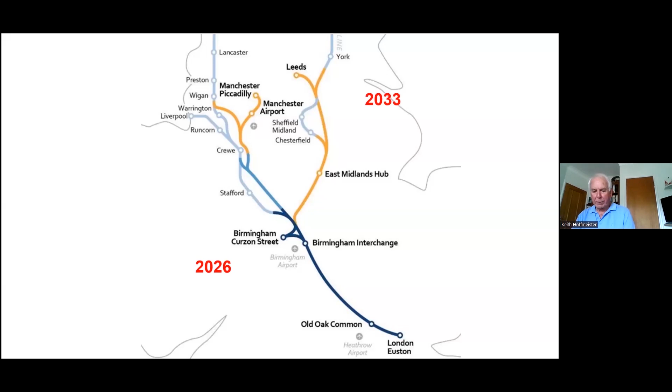I'd like to start with a much revised construction timetable. Phase 1 will run from London to Birmingham and was originally due to be completed in 2026. Phase 2A will run from West Midlands and then on to Crewe, and Phase 2B extends the route to Manchester and Leeds, and these were originally due to be completed in 2033.

In 2019, HS2 confirmed that the project would be delayed by up to 7 years. Phase 1 would now be completed sometime between 2028 and 2031. Phase 2A sometime between 2030 and 2034. And Phase 2B, the western leg from Crewe to Manchester, 2035 to 2041. The eastern leg to Leeds was cancelled in 2021.

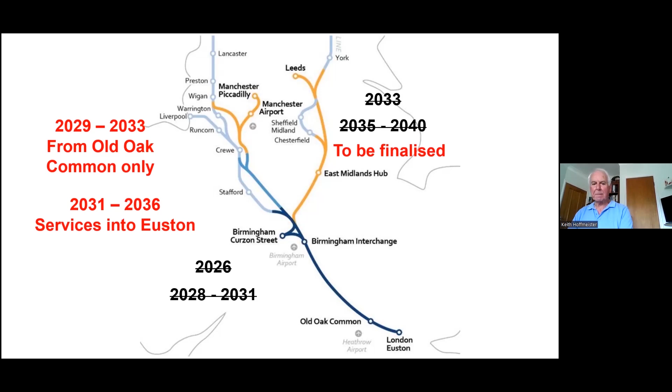In 2020, it was announced that initial services would start in 2029 at the earliest, and that they would start from Old Oak Common in West London, not Euston. Services wouldn't start from Euston until at least 2031 and possibly 10 years later than first stated. The planned initial 14 trains an hour in peak times would not be possible until services start and finish at Euston. Old Oak Common can only handle 6 trains an hour.

In March this year, in an attempt to cut the spiralling costs, it was announced that Phase 2A, the Birmingham to Crewe leg, and Phase 2B on to Manchester would be delayed by up to 2 years, as would Euston Station.

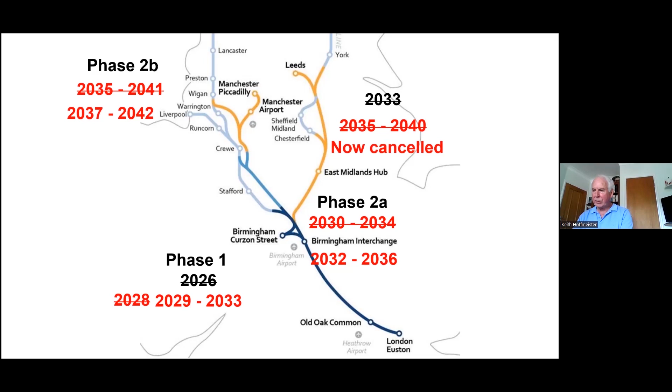Transport Minister Huw Merriman stated that the government remain committed to delivering HS2 services to Euston, but that it will take time to ensure an affordable and deliverable station design. They've already had 8 years, which means delivering Euston alongside Phase 2B to Manchester is now at least 15 years late.

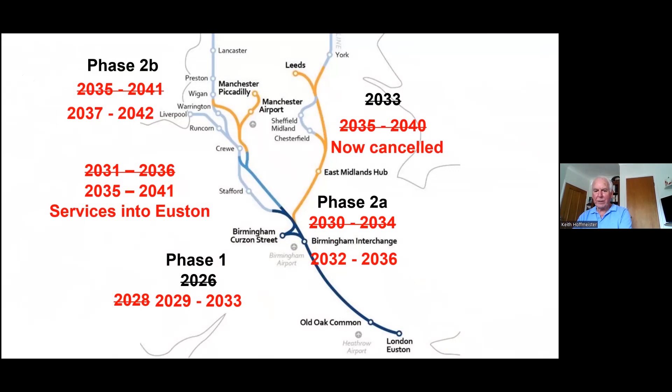The cost of the new station has now risen to an estimated £4.8 billion, almost double its estimate just 3 years ago. And this was for the cut price rethink devised when the first design was deemed too elaborate and expensive.

The Department for Transport revealed that significant elements of the original design work on Euston Station could no longer be used. As a result, HS2 Limited had to discard large parts of the original design on which it had already spent some £105 million.

Just yesterday, the Public Accounts Committee accused the government of setting unrealistic budgets and failing to learn from other troubled rail schemes. The report said that despite the Department for Transport planning the station for 8 years, it still did not know what it was trying to achieve.

It also criticised pausing construction without knowing how much this would cost or assessing the impacts on the supply chain. Dame Meg Hillier, chairman of the committee, described the project as floundering and accused the government of forging ahead over-optimistically and in an unclear direction.

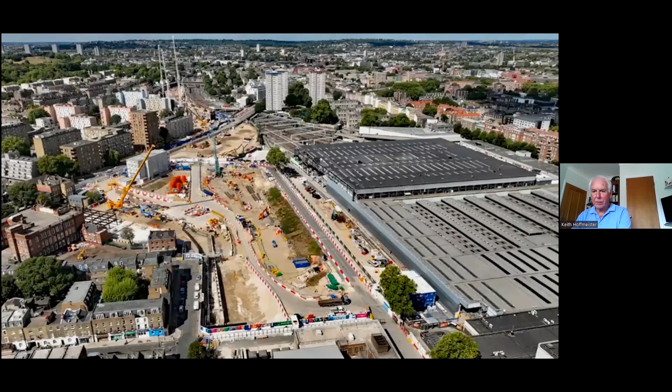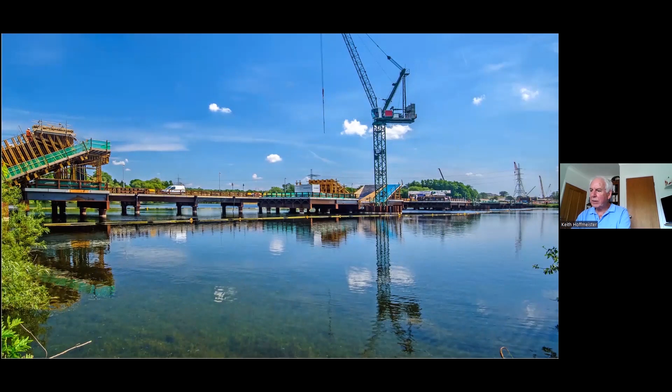A haul road has been constructed along the length of the viaduct on a series of jetties across 4 lakes. This is looking back across the first lake towards the south end of the viaduct, showing the construction of the giant viaduct piers.

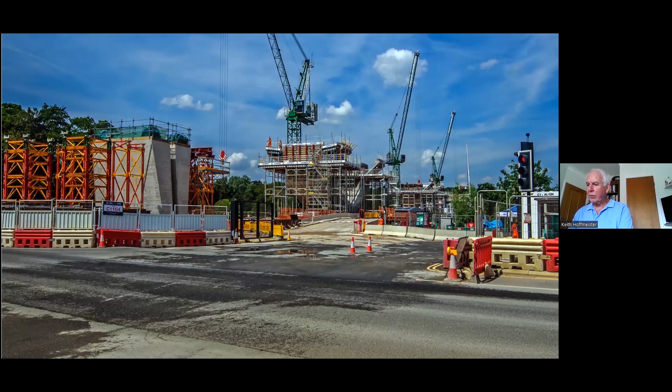Now, looking north across the Grand Union Canal, showing the piers being constructed across Savay Lake. Now, this is the first road it will cross, looking north from Moor Hall Road, where it's actually crossing Korda Lake. And the road here will soon be closed for a month to allow construction of the viaduct across the road.

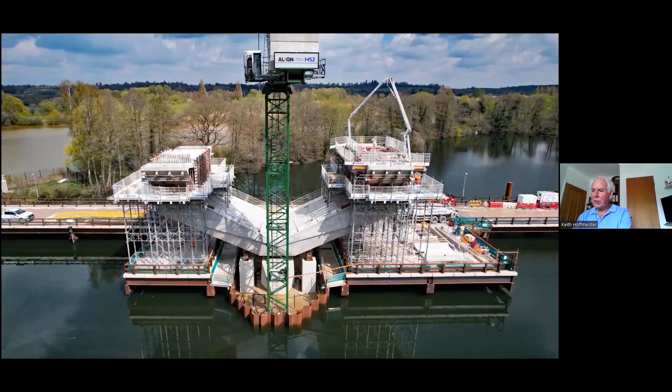The first of 11 enormous V-shaped piers have been completed across the lake. The piers, each weighing 1,800 tons, will support a row of elegant arches inspired by the flight of a stone skimming over the surface of the water.

Cofferdams were used to hold back the water while the 60-metre deep foundations were built into the bed of the lake. This is the launching girder, and it's currently working its way across the River Colne.

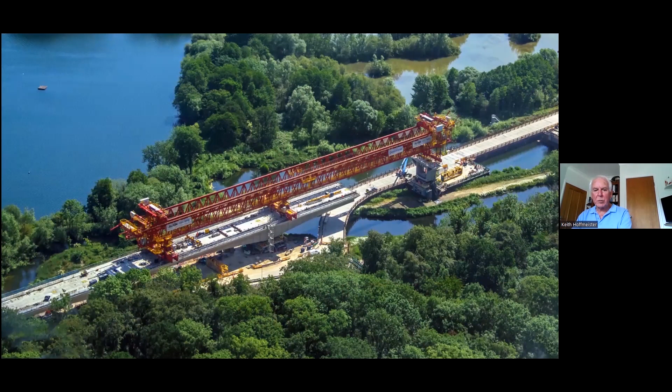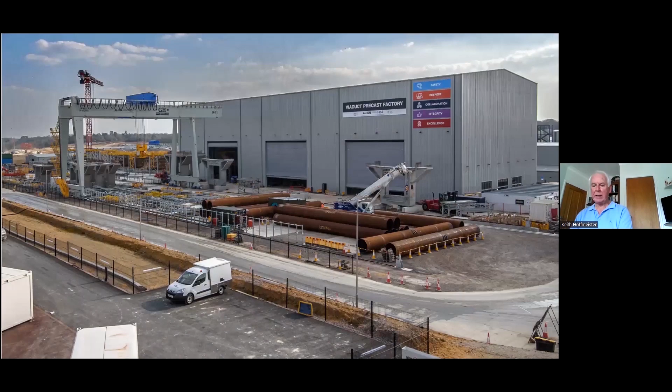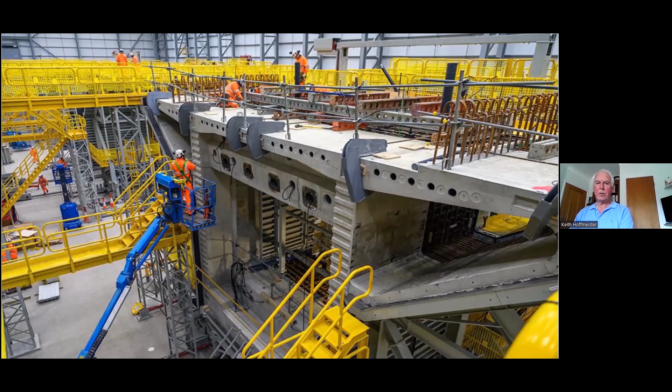Just a reminder that all the viaduct sections are made on site. The factory used to make them is actually bigger than the Albert Hall. They are currently making 12 a week, and 1,000 will be needed altogether. As the viaduct is on an elongated curve, every segment will be slightly different shape, depending on where it fits into the viaduct.

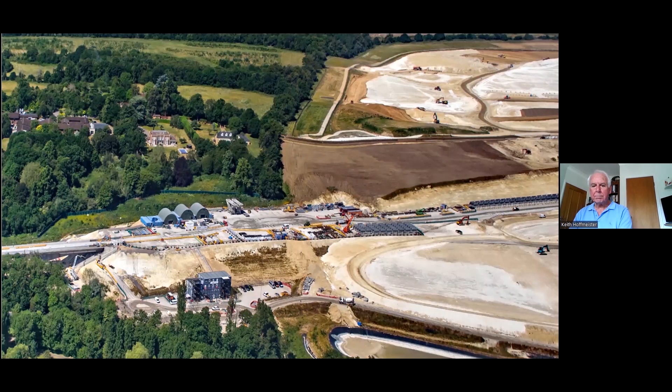The route leaves the viaduct on the West Hyde embankment at the northern end. It then enters the Tilehouse Lane cutting. The spoil removed from the Chiltern Tunnel and all of the tunnel ventilation shafts is being used for local landscaping here.

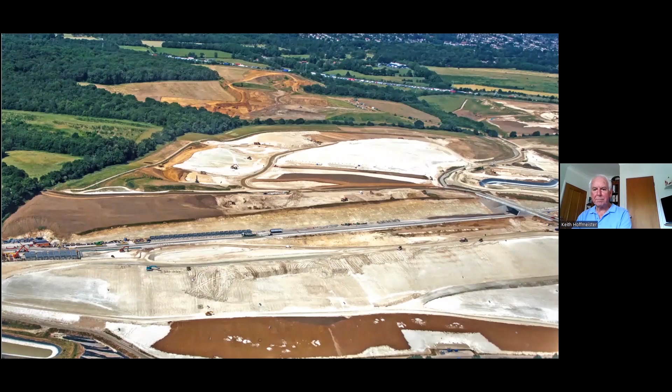This is the actual tunnel portal, the entrance to the tunnels. It shows the close proximity of the M25, which you can see running across the top of the picture. This is west of junction 17. The tunnel boring machines, the TBMs, started work here in May 2021.

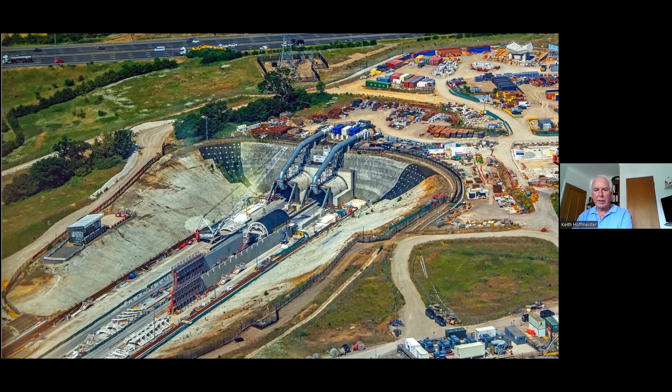Crosses show the area we'll be looking at now, from the M25 across the central Chilterns all the way to Wendover. This shows the 4 tunnel ventilation shafts across the Chilterns. There will also be an intervention shaft near the North Tunnel portal at South Heath. The A413 is the road that runs past the Chalfonts and Amersham and then on to Great Missenden and Wendover.

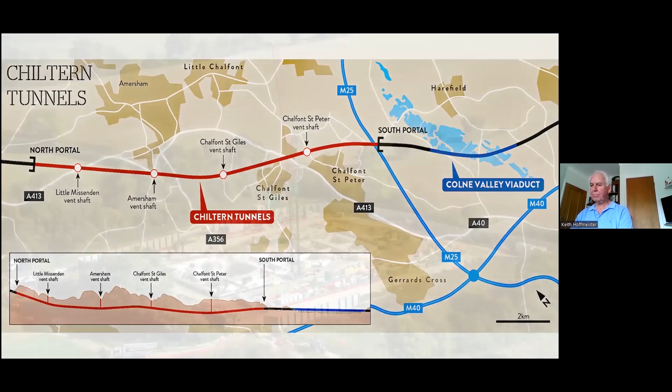This is the first of the shafts, the Chalfont St Peter vent shaft. You can see alongside the shaft itself the basement that will house the ventilation fans, which has been constructed. The fans are now underground, so that's what the basement is for.

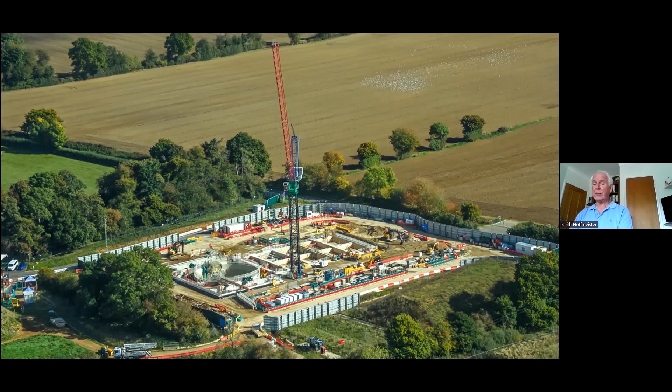Construction of all of the shafts themselves is now complete, and this is a compilation of the ongoing work at all of the vent shafts.

So this is a basement which will house the fans, which I just mentioned. They were all made using what they call secant piling, where the walls are constructed using interlocking piles, and the material is then removed, creating the basement.

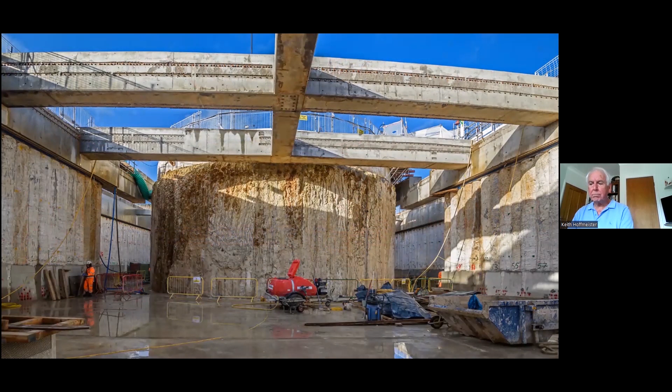The top of the shaft is then revealed. And then this is removed down to the basement level.

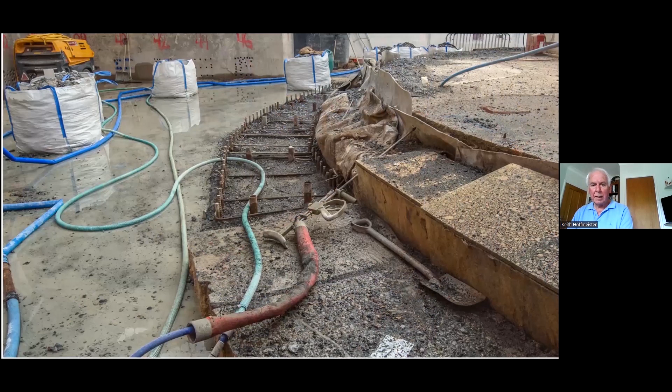The final sections are actually removed using a method known as hydrodemolition. This uses what is in effect a very large jet washer, which has a pressure of 3,000 bars. It can actually cut through concrete and even the steel reinforcement. And just to give you an idea, the water leaves the end of it at 1,500 miles an hour.

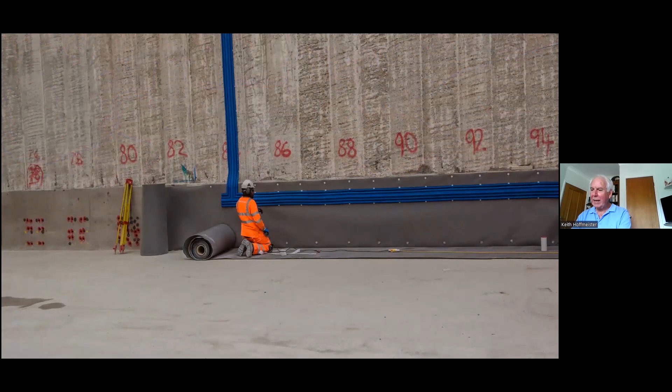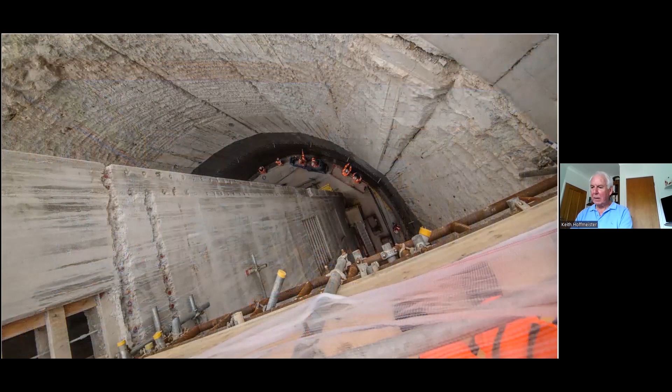Great care is taken installing a waterproof membrane over the whole area. A base slab is then laid and the walls lined. Internal work structures within the shafts are then added and tunnel connections installed at the base.

Here, reinforcement is being put in place, ready for the shaft lining. And this is the basement level of the shaft.

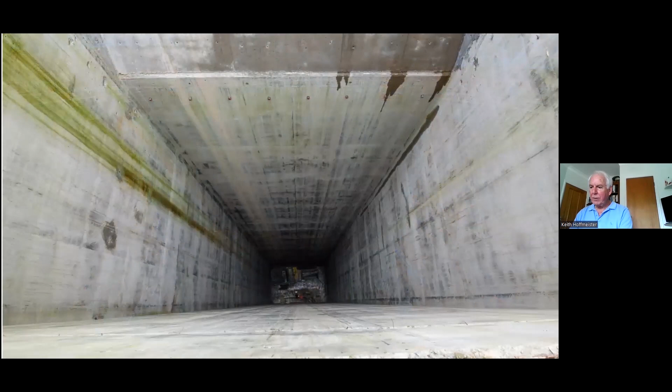Chalfont St Peter is the deepest of the shafts, at over 66 meters. Internal work structures within the shaft and the tunnel connections are now being installed, and the tunnels themselves are 55 meters below ground level. To put this into perspective, Nelson's Column would fit in the shaft above the tunnels.

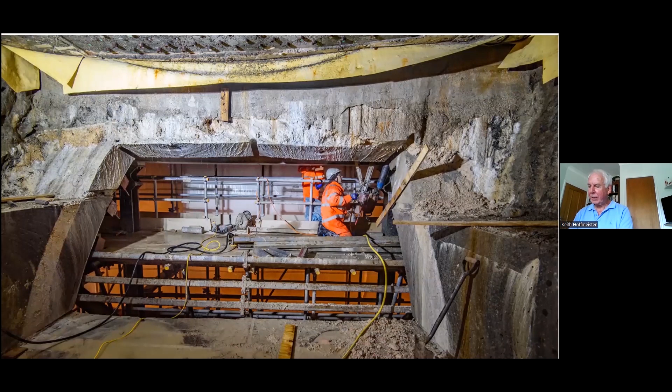The lift descends 12 levels before reaching the tunnels. And here they are cutting through from the vent shaft into the upline tunnel. The TBMs arrived here in March last year. And you can just see beyond the chap himself, that is actually into the tunnel.

A 400-metre long temporary haul road links the site directly to the A413. All the construction sites have approved access routes which HGVs must use. The one for this site is via the A413 to the A40 at Gerrards Cross and then to the M40. Temporary traffic lights control traffic on the A413.

The haul road will be in operation until the shaft is completed early in 2025. It will then be removed and the land restored to its former use.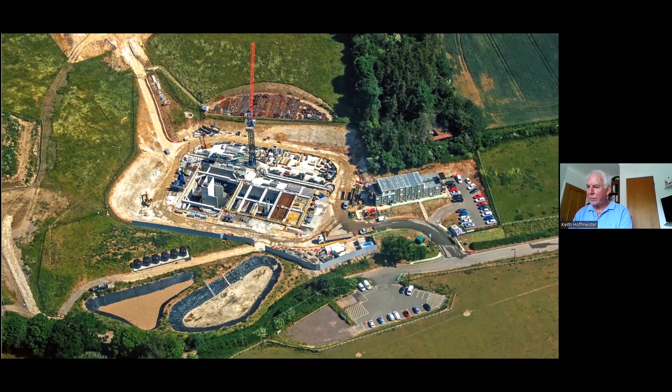The TBMs reached here last September.

And the shaft depth here is 34 meters, so quite a lot shallower than Chalfont St Peter's. The tunnels are 26 meters below ground.

That's looking down to the bottom of the shaft. And the locals, as you can see here, have got used to the work going on.

You can see clearly the temporary haul road going back to the A413 at the top of the picture, and just beyond there is Harewood Downs Golf Club, so it gives you an idea of where it is. This will be removed once construction of the vent shaft is complete.

All the HGVs have to turn right when leaving the haul road and use the same access route as for the Chalfont St Peter shaft. Bottomhouse Farm Lane will be reinstated, but it has not been decided just how this will be done, as the original approach to the junction was too steep.

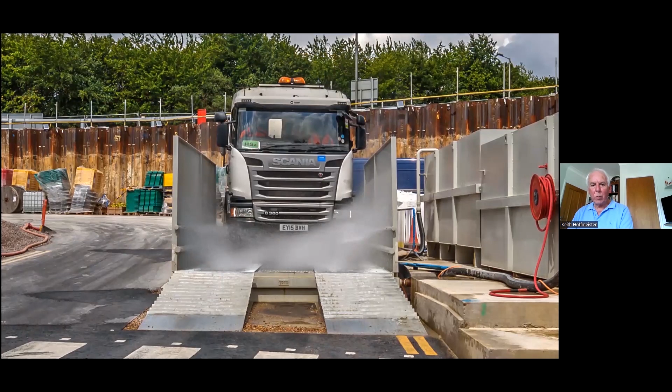All the vehicles have their wheels washed before leaving all of the sites, and there is continuous dust suppression in dry weather. As with most sites, air quality and noise levels are constantly monitored.

Beyond Amersham, the tunnel passes between the 18th century Shardeloes House and Shardeloes Lake. During the early hours of Saturday, the 13th of May, a sinkhole opened up about 100 metres south of the lake.

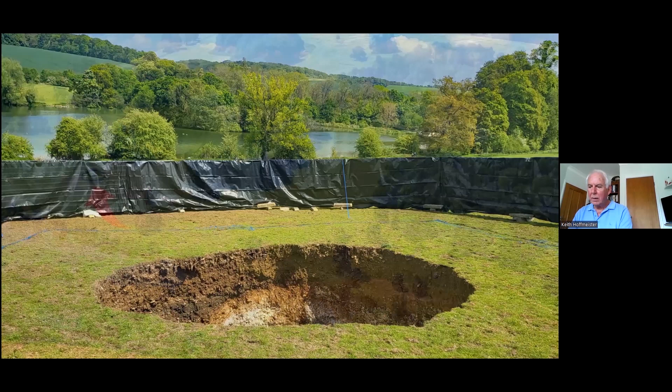The hole was approximately 6 metres in diameter, 5 metres deep, and 32 metres above the HS2 tunnel being drilled by one of the TBMs. And this is an explanation of exactly what happened.

Earlier in the week, the TBM, named Cecilia, digging the down tunnel, had been stopped for routine maintenance. On restarting, it ran through a dissolution feature, a void in the chalk, which contained large loose lumps of flint. These damaged the flexible pipework between the cutter head and the spoil pipeline, which required another stop for repairs.

The disturbance caused the unstable ground above the tunnel to fail and collapse, and this was propagated back to the surface, creating the sinkhole.

Backfilling works have not yet begun, nor has a thorough plan been agreed. This is actually on private Grade 2 listed land, and discussions with the landowner continue. The contractors intend to excavate below the bottom of the hole until competent ground is reached before backfilling begins.

The TBMs then passed under the Misbourne for the second time. There were no problems with the first crossing at Chalfont St Giles, and I'm very relieved to say there were no problems with the second crossing either, much to the relief of many people, not least, I'm sure, the tunnelling engineers.

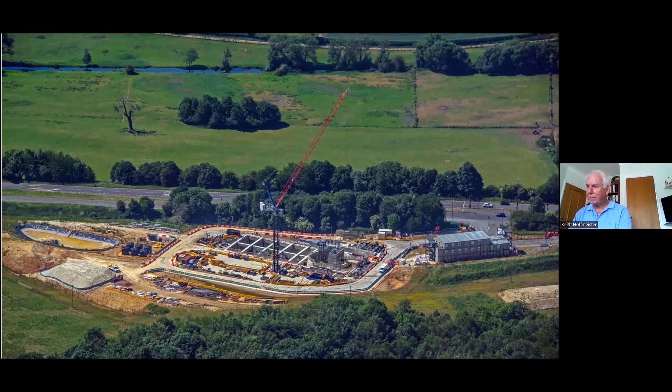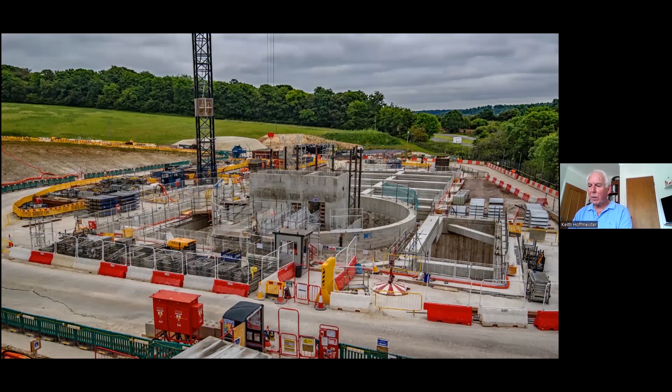The shaft depth here is 31 metres, and the tunnels will be 24 metres below the ground. The TBMs reached here last month and are now on their way up the hill towards South Heath.

Access to the site here is via a temporary right-hand turn across the dual carriageway. This saves a five-mile round trip to the Frith Hill roundabout at Great Missenden. This will be removed once construction is complete.

And this is another picture taken yesterday. At the moment, there are daily lane closures to allow careful monitoring checks for possible subsidence.

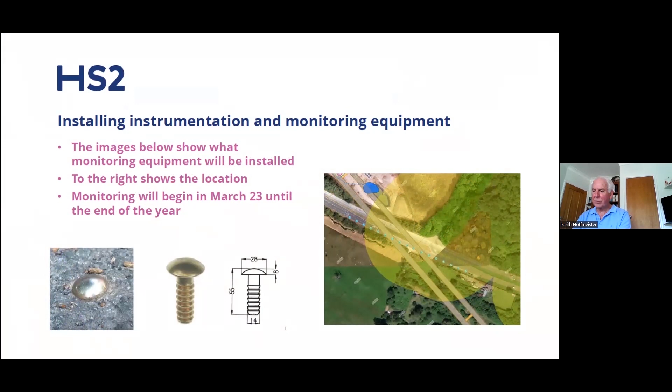The Chesham Road shaft is an intervention shaft only. It won't have any fans, so it will not have a basement.

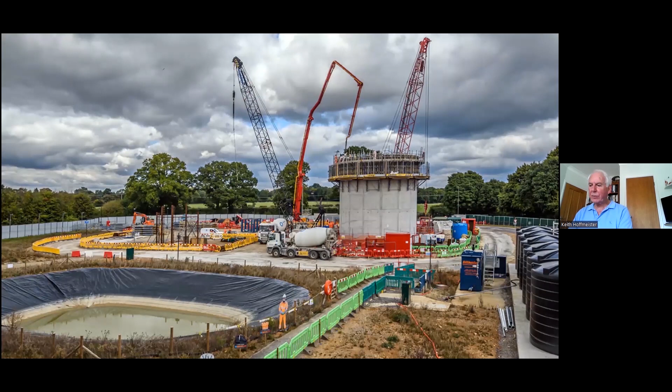Because the shaft is above the water table, a different form of construction called the caisson method was used for this shaft. Sections of the caisson are constructed above ground and then sunk to the required level by excavating material from within the caisson.

Shaft depth here is 46 metres and the tunnels will be 33 metres below the ground. The TBMs are due to arrive in October or November this year.

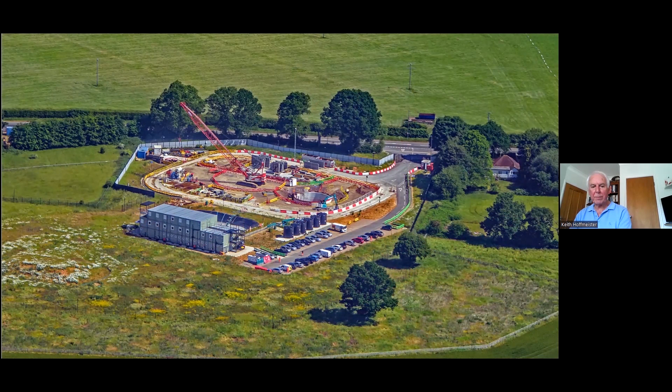The Chiltern Tunnel North Portal is just over a kilometre away, and Sibley's Coppice is the piece of ancient woodland between the two. This picture gives you an idea of just how close it is to the portal.

Here we're looking north towards the portal and the South Heath cutting beyond. Frith Hill is at the bottom of the picture.

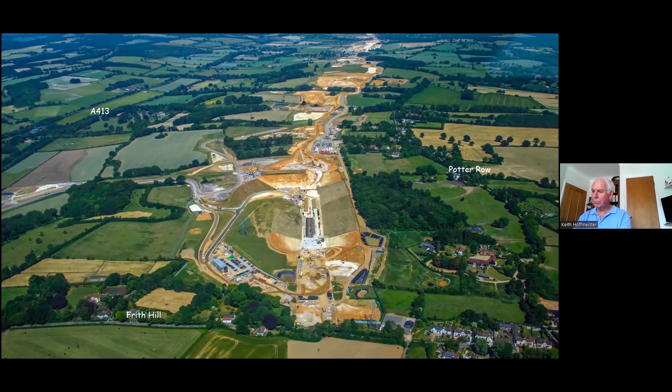This is looking west across the tunnel portal towards Great Missenden. Access to this next section of the route is via the temporary haul road from the Link Road roundabout on the A413.

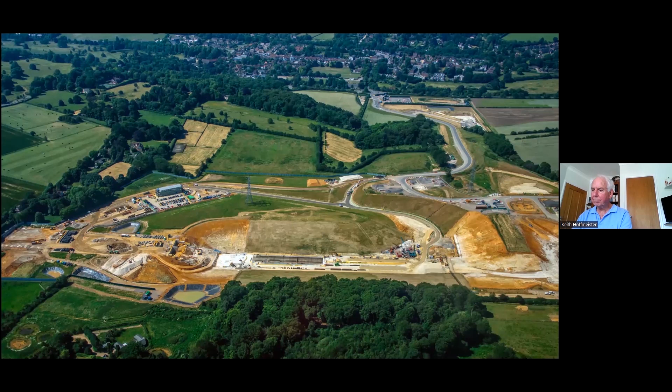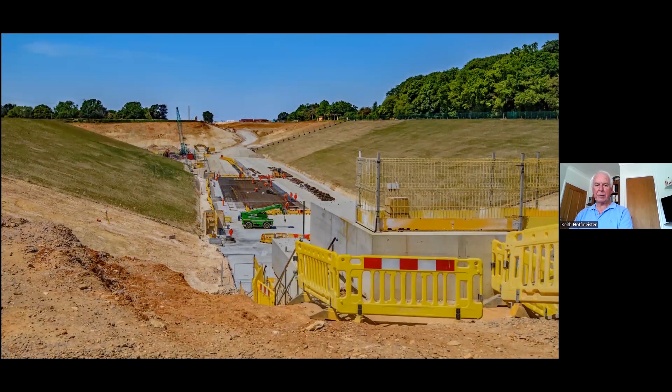Here we're looking north towards the South Heath cutting from the portal west flank wall. Work is also underway here, building an ancillary building to the left of the cutting.

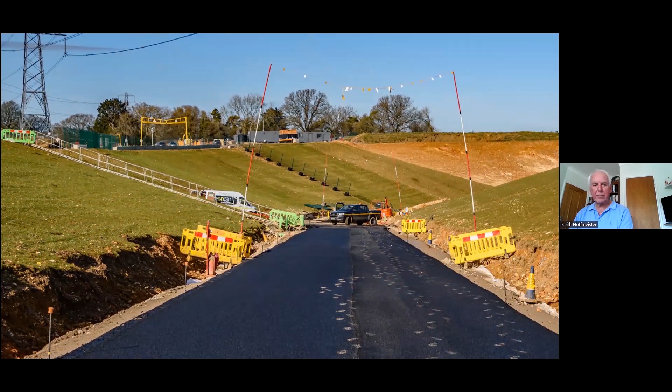Here we are looking south along the South Heath cutting towards the Chiltern Tunnel North Portal. As this is 15 metres below the ground, it won't be visible from the surrounding area.

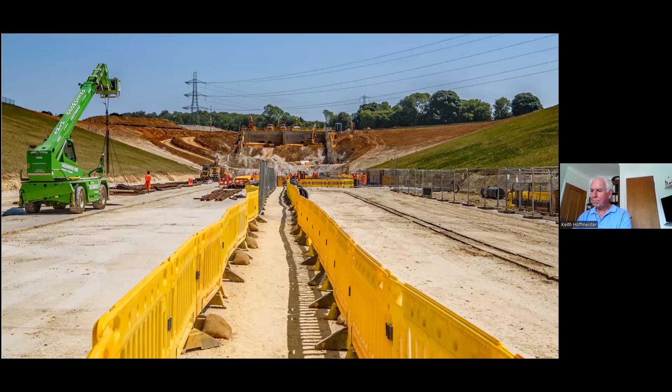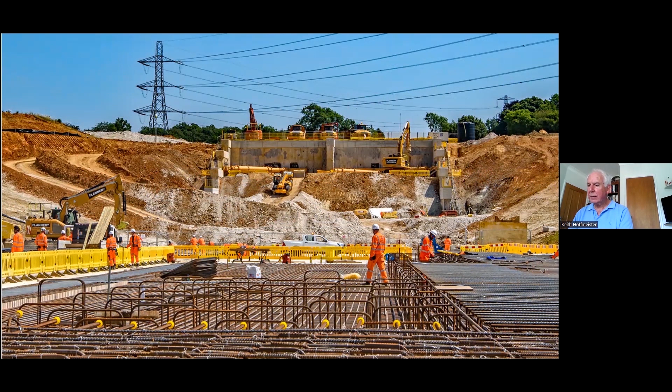This will be where the TBMs will exit the tunnel. They are due to reach here in December. They will then be dismantled and scrapped.

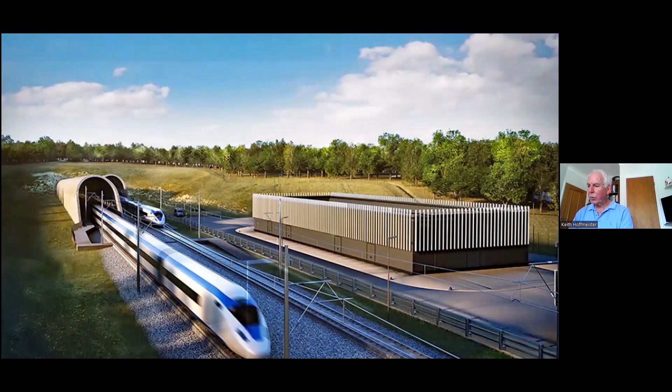Trains will eventually leave the tunnel here, travelling at about 200 miles an hour. So these are the tunnel portals and the ancillary building alongside the track.

The porous portals provide air pressure and noise relief for trains entering and leaving the tunnel. For trains entering the tunnel, the up line, the portal is 220 metres long, and for those leaving the tunnel, the down line, the portal is 135 metres long.

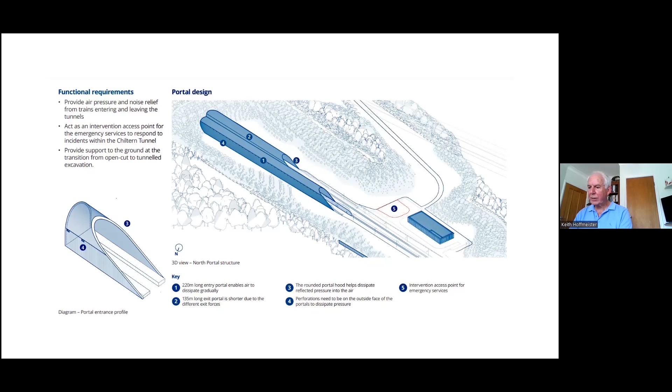Access to the North Tunnel portal is via a temporary haul road from the Link Road roundabout at Great Missenden. Another haul road has been constructed alongside the route, linking all the construction work as far as Wendover. It means a lot more devastation, but it does remove traffic from local roads.

A section of the central reservation between the Frith Hill and the Link Road roundabouts on the A413 has been removed to allow very large loads direct access to the haul road.

These loads will initially be sections of the Wendover Dean viaduct. There will be 90 of these loads, each consisting of 30-metre long steel girders coming all the way from France, and delivery is now underway.

The route continues in a cutting under a series of bridges. In this section, they are all over bridges, meaning that they cross over the railway.

Between Euston and the Chiltern Tunnel North Portal, the design speed progressively increases to a maximum of 200 miles an hour. The route alignment has been designed to enable speeds of up to 225 miles an hour on the route north of the Chiltern Tunnel.

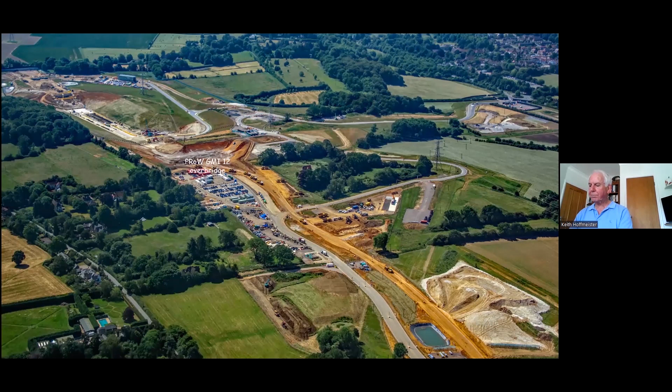Here we're looking south back towards the tunnel portal, and the first bridge, which will be a footpath over bridge, footpath GMI 12, and this will give the only view of the portal. This is what it might look like.

Looking east towards Potter Row, showing the first two footpath overbridges. This shows the second of these, GMI 2, where construction is now underway. It's actually called an accommodation overbridge, meaning it will also be used for farming access.

The route then crosses Leather Lane. Offline construction means the bridge will be built to the south of the road, which will then be diverted once construction is complete. 11 large oak trees have been removed so far. An alternative plan for the overbridge involving the loss of fewer trees has been put forward, and this is still being assessed, and we still await developments.

Leather Lane is an important bat corridor and provided refuge to at least 7 species of bat, including the endangered barbastelle bat. There's also a campaign to save an iconic oak tree, which has been named Ilona, as it stands in the way of a proposed earth bund.

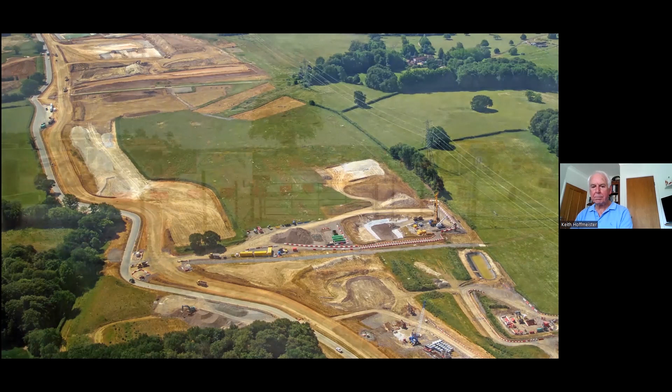Nearby, Cottage Farm Overbridge will cross the route. Moving north, the next bridge will be another footpath accommodation overbridge, this one TLE2. You can see here that piling is now underway. The footpath is closed for the construction period and will eventually be realigned over the bridge.

The next road bridge is Bowood Lane Overbridge. Here we are looking east from the bridge towards King's Lane.

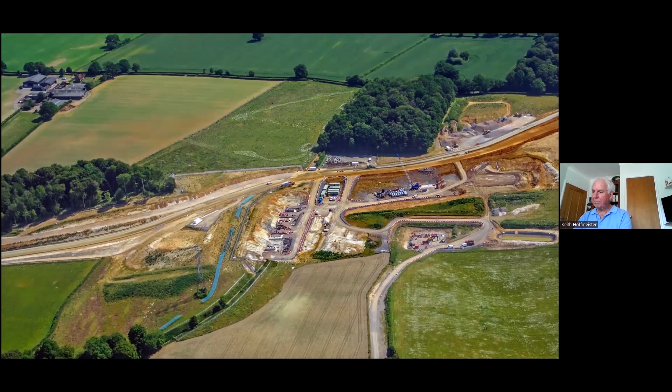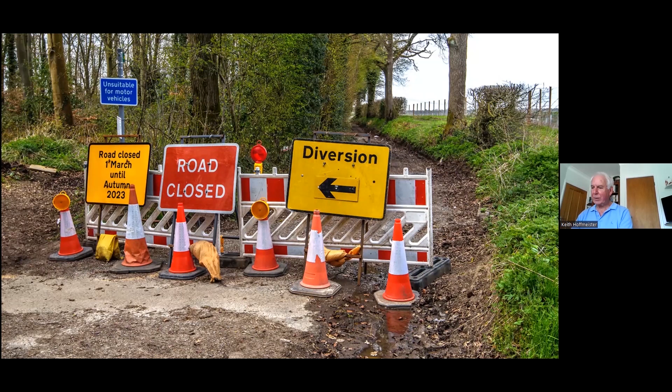As this is being constructed online, Bowood Lane is closed before being reinstated across the bridge. I can't help thinking autumn 2023 is somewhat optimistic.

You can see exactly where the bridge will be. At the bottom of the picture, you can see the two sides of the bridge. Although construction is well underway, there is a limit as to how far this can proceed, as the plans submitted have been rejected by Buckinghamshire Council. Again, we await developments.

The public footpath that runs alongside Bowood Lane remains open, and there is a manned crossing here, just as well with the large numbers of these dump trucks using the haul road. All other footpaths crossing the route in this section are closed during construction, so this is a vital diversion route for some, including the very popular Chiltern Way.

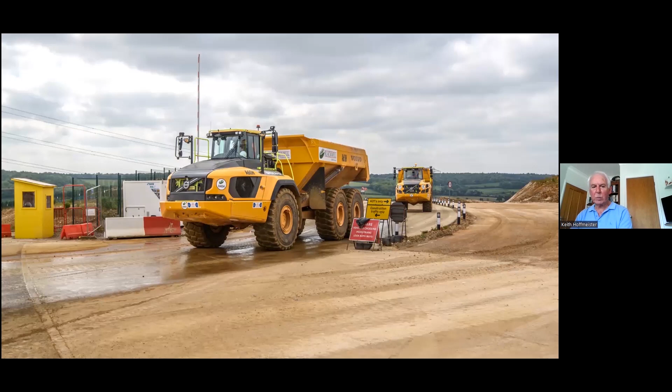The route continues over Wendover Dean Viaduct, starting just north of Jones Hill Wood. The route is getting close to the A413 here, and the work can be seen from the road. Here you can see both the north and south abutments and the piers that will support the viaduct. Although Durham Farm has been demolished, one barn remains awaiting asbestos removal.

The viaduct will be 450 metres long and consists of 10 spans. The maximum height will be 20 metres, and it is designed for trains to travel at 225 miles an hour. The piers and viaduct sections are to be cast off-site before being transported to the road site by road, as previously mentioned.

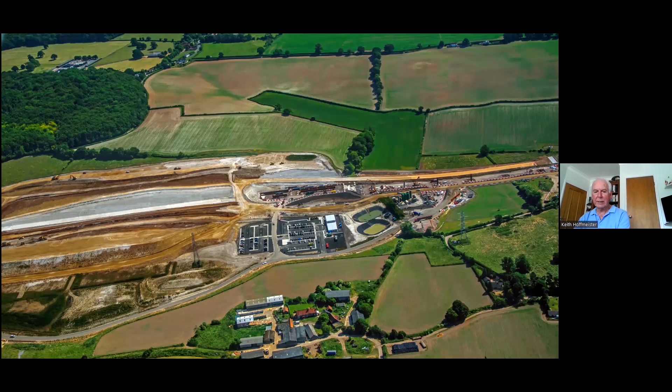Farmers are managing to grow crops here right up to the line. And the viaduct will be clearly seen from the other side, the western side of the Misbourne Valley.

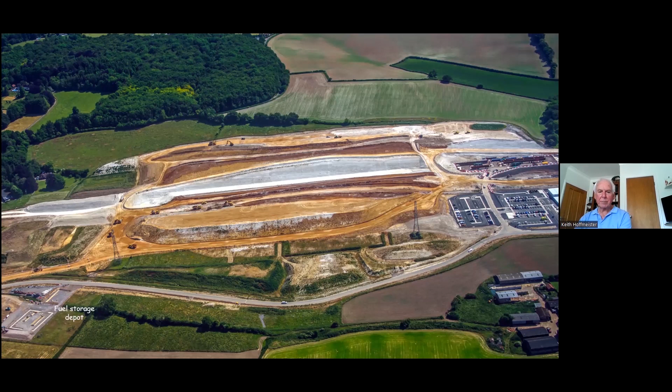North of the viaduct, the route continues into the Rocky Lane cutting, and this shows the very wide swathe of land used, much wider than was first envisaged. A plant maintenance and fuel storage depot is being constructed here, at the bottom left of the picture. And the whole road has been realigned to the east of the cutting, up to above the cutting in the picture.

The route then crosses Rocky Lane on its way towards Wendover. This will actually be an underbridge, meaning it will go under the route. And you can also see EKFB, the contractors here - their satellite compound just to the south of the underbridge.

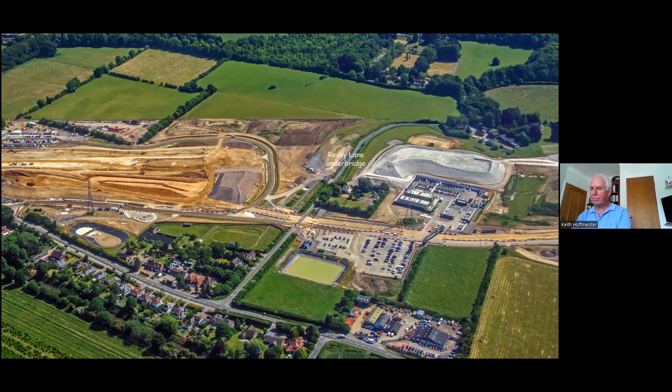Offline construction means that this busy lane will remain open while a bridge is constructed just to the north of the lane. The lane will then be realigned under the route.

The viaduct will be 345 meters long, and it will take 2 years to build. It will take the route over the A413, the Chiltern Railway, and also Small Dean Lane.

The A413 needs to be realigned eastwards this summer to allow piling between the railway and the A413. The first stage of the work has been rerouting of water and gas mains, which required a weekend closure of the road. This caused chaos on some of the smaller local roads, with motorists unsurprisingly avoiding the signed diversion route, which is via the A40 through High Wycombe and is 30 miles long. There are also regular lane closures here, which cause delays on this very busy road.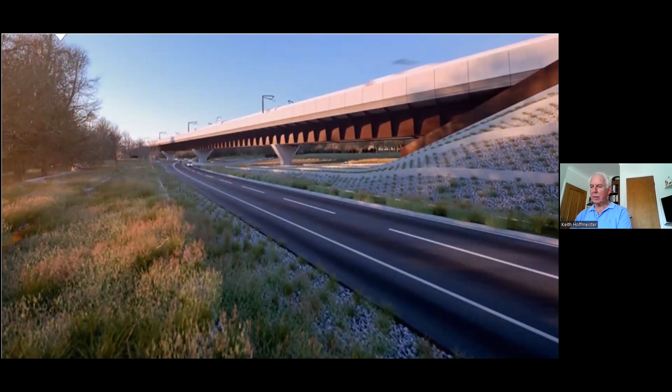This is an artist's impression of what the viaduct might look like, and you can see where the road will wind round one of the piers. The underside of the viaduct will be just 6 meters above the road and supported by 5 Y-shaped piers.

Apparently, it was designed to echo the great railway bridges of the Victorian age. There will be noise barriers along the top of the viaduct. The piers themselves are expected to be completed early in 2025, and the bridge deck will be launched later that year. It's due to be completed in 2026.

A fully enclosed 600-meter long conveyor system has been built to remove the stored spoil from earlier earthworks. It will transport the spoil across the A413, the Chiltern Railway, and Small Dean Lane, moving an estimated 1.4 million tonnes of materials. It's expected to save some 400 HGV movements a day over a 3.5-year period.

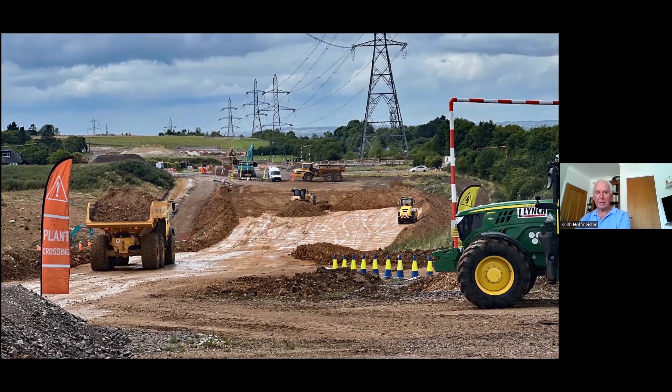Some of the spoil here is being used to build the Small Dean North embankment, which will take the route on towards the Wendover Tunnel. Small Dean Lane is closed during construction of the viaduct, and this is a temporary bridleway which bypasses the closure.

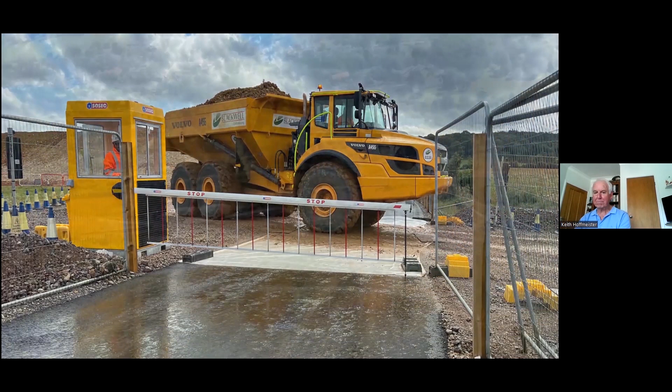Fortunately, there is another main crossing here with these huge dump trucks crossing regularly. The route continues on an embankment up to 14 metres high alongside the Wendover bypass. Grove Farm Underbridge will take the farm access road under the railway line, and this will actually be the last bridge in the Chilterns.

The tunnel will be 3/4 of a mile long, and it will be built by excavating a cutting in the ground, forming a tunnel box from precast segments and then covering it over with landscaping.

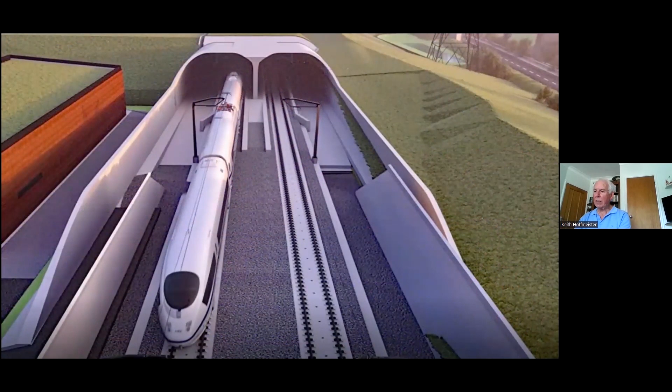Designed as a double arch, the tunnel will have 2 separate halves for southbound and northbound trains. 5 different concrete precast segments will be slotted together to achieve the double arch. Each one will be steel reinforced, with the largest weighing up to 43 tonnes. Altogether, over 2,500 segments will be used.

The segments are being made in Ilkeston, Derbyshire, and transported all the way by road. The tunnel itself will have specially designed porous portals on both ends to reduce the noise of the trains as they exit.

There are serious concerns still to be resolved that construction would interfere with the flow of water into the Wendover Arm of the Grand Union Canal and Weston Turville Reservoir Nature Reserve, diverting it towards Stoke Mandeville and thus increasing the flood risk there.

Ellesborough Road will be diverted behind the remaining houses during construction and then reinstated along its original alignment. 7 public rights of way are affected and most are now closed until construction is complete. The ancient Ridgeway will be diverted along the temporary road before being realigned over the tunnel.

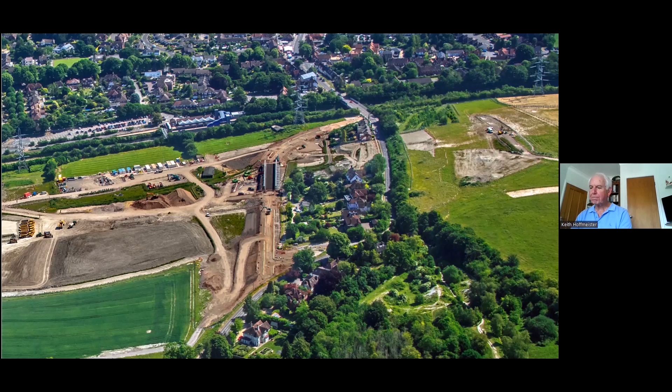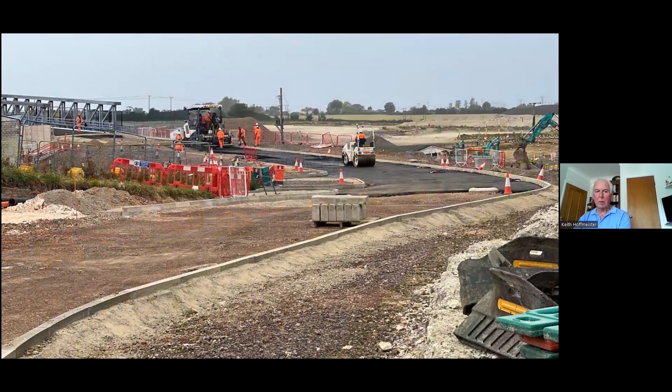You can see a bridge in the middle of the picture, and this will take the diversion over the actual tunnel route. The road is due to open in September after the utility works to divert underground services over the bridge itself.

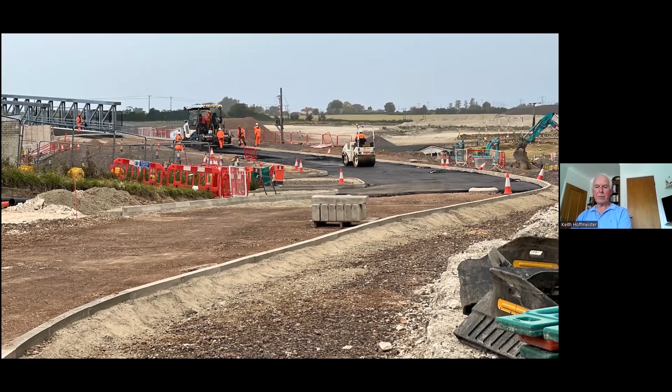It rejoins the original road alongside the bridge over the A413. The diversion actually starts just to the west of Wendover.

Beyond the tunnel portal, the road continues in the Wendover North cutting. Excavation has been limited by the Environment Agency to the removal of the topsoil until plans for handling interference to the Coombe Hill aquifer have been approved.

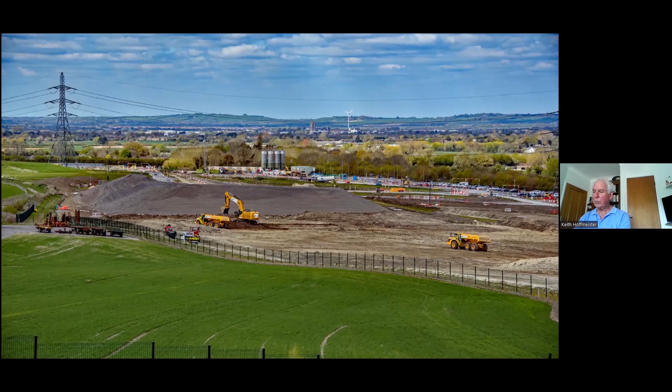And that's again more or less the same view as it was. Little did we know then just what treasures would be uncovered here by the archaeological excavations prior to construction.

This is the Wendover North cutting. So they come out of the tunnel portal on the right of the picture, then enter the Wendover North cutting.

And the route then leaves the Chilterns, passing under Nash Lee Road at the end of the Wendover bypass. So you can see Nash Lee Road is actually stopped up in the middle of the picture.

It's now been diverted to allow for the construction of the Nash Lee Road overbridge. So you can see there the diversion in the middle of the picture, the stopped up road, and then Nash Lee Lane to the right of the picture.

And this is the bridge that will take the road over the route, a temporary bridge. The haul road continues towards Stoke Mandeville and eventually takes the spoil northwards for use further up the route.

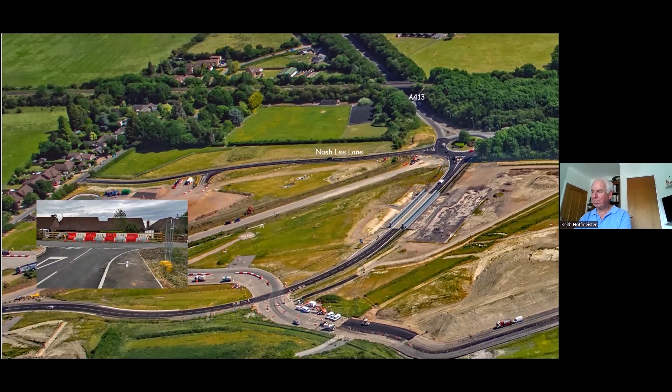The approved access route for all of the sites, as I said, is back towards Amersham. This is all the sites as far as Stoke Mandeville, round the 413, and then all up the 355 to Beaconsfield. These are the forecast daily HGV numbers travelling along the A413, Amersham Bypass and Gore Hill.

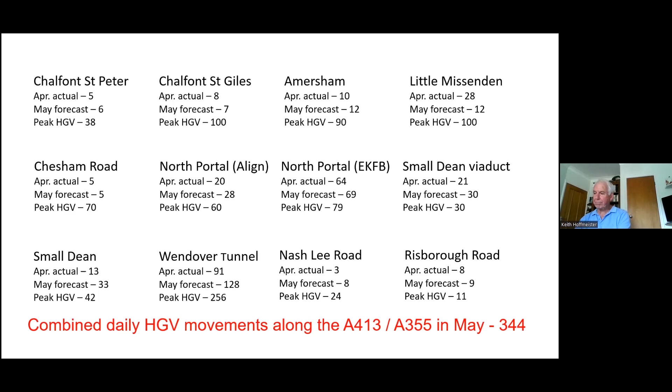I will finish here, as I have not had time to process the pictures of the route across the Vale of Aylesbury, and maybe we can cover that in section at the next update.

You can see most of the pictures I've used by visiting the HS2 photo diary on the Chiltern Society website, and this shows the impact at a number of locations across the Chilterns and is constantly updated. There are also various links to videos, including a virtual fly-through along the route from Denham all the way to Calvert beyond Aylesbury.